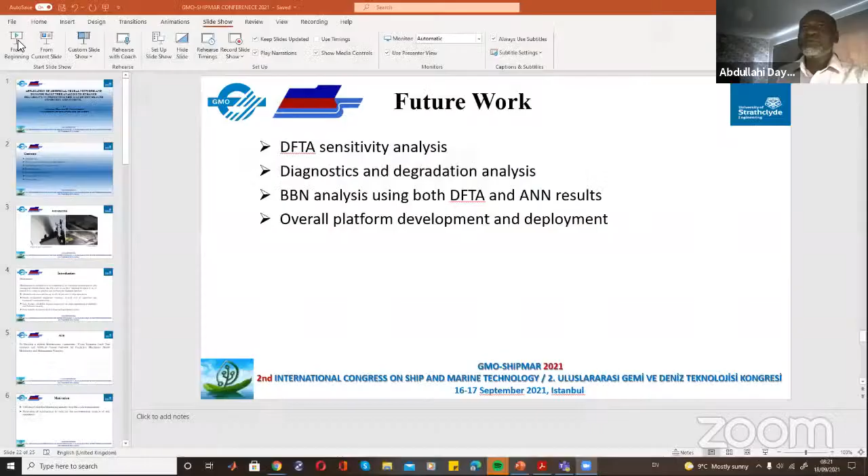So my name is Abdullahi Daya. I'm from the University of Strathclyde. I'm studying PhD in marine engineering, and my main research area is on ship systems reliability. I'm currently serving with the Nigerian Navy as a marine engineer, and I hold the rank of commander.

This morning, I will be presenting on the application of artificial neural network and dynamic fault tree analysis to enhance reliability in predictive ship machinery health condition monitoring. To do this, I will be discussing introduction, motivation of the research, background and literature review, my methodology, machinery data analysis, results and discussions, then we'll look at future work.

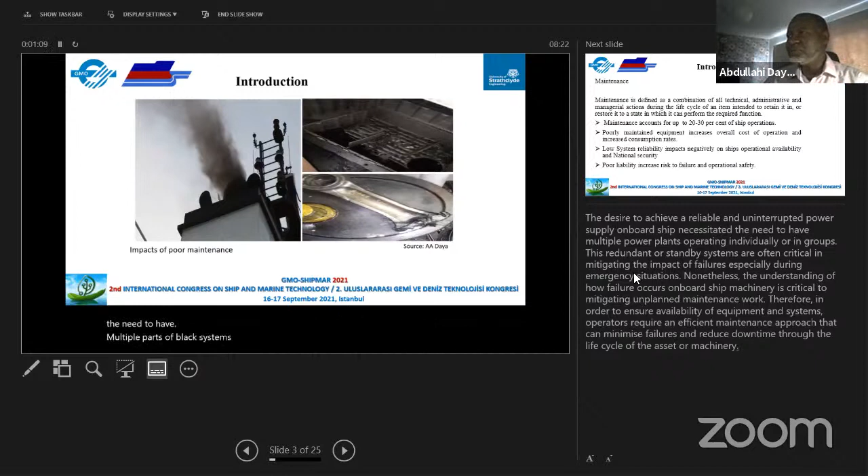Maintenance. The desire to achieve a reliable and uninterrupted power supply on board ship necessitated the need to have multiple power supply systems, either in parallel or individually, just to make sure that the ship is always available.

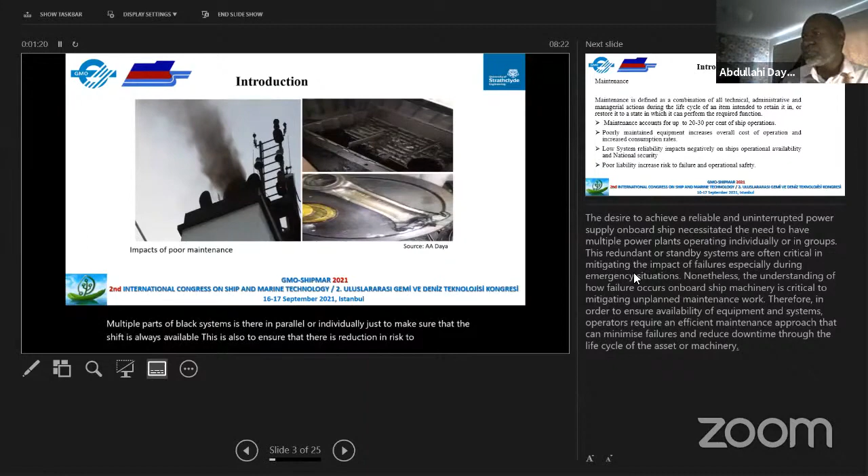This is also to ensure that there is reduction in risk to navigation, and also there is enhanced safety. Therefore, to improve this, there is need for an organized way to ensure that these machineries are always operational and available. Therefore, maintenance is defined as a combination of technical, administrative, and managerial actions during the life cycle of an equipment.

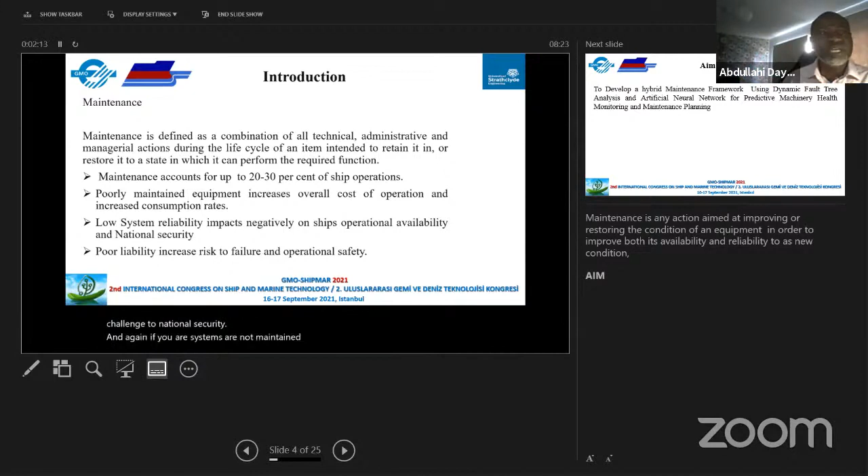Accordingly, my aim is to develop a hybrid maintenance framework using dynamic fault tree analysis and artificial neural network for predictive machinery health monitoring. That's the overall aim of the research.

What motivated the research is the utilization of condition monitoring data for ship life cycle management. A lot of times you discover that ships towards the end of their life face a lot of challenges, and I feel if there's proper record keeping, we may be able to have a better life towards the end of the ship. Also, the relevance of maintenance to reducing the environmental impact of shipping operations.

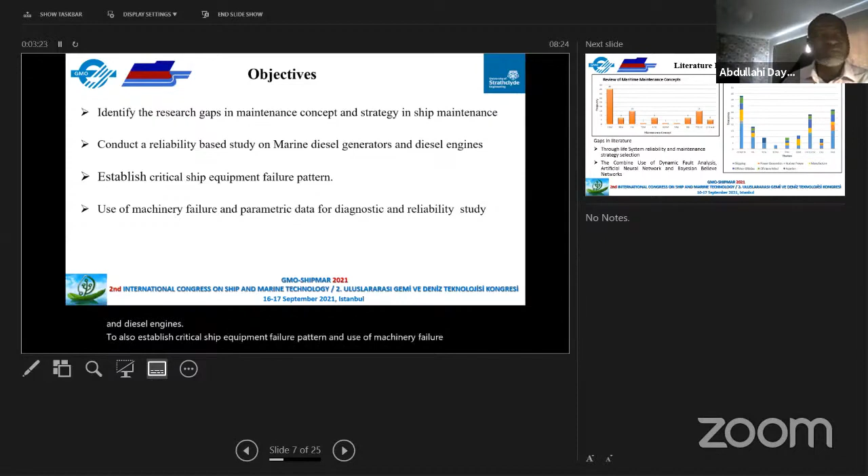Therefore, the objective of this study is to identify research gaps in maintenance concept and strategy in ship maintenance, to conduct reliability-based study on marine diesel generators and diesel engines, to also establish critical ship equipment failure patterns and use of machinery failure and parametric data for diagnostic and reliability studies.

Within this period, we've conducted extensive literature review to show which aspect of maintenance is most reviewed and which is actually being used in the industry.

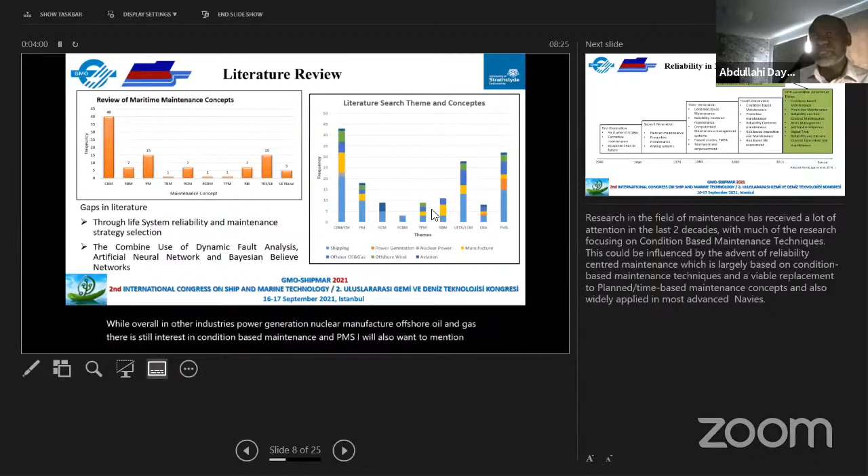So for instance, in the maritime industry, there is a lot of interest in condition-based maintenance, while overall in other industries, power generation, nuclear manufacture, offshore oil and gas, there is still interest in condition-based maintenance and PMS. I also want to mention that maintenance approaches like RCM are still being used, but generally in the maritime industry it's mainly to do with naval shipping.

So over time, the advance in maintenance has led to the emergence of a fifth generation of maintenance, which is based on the Internet of Things, also referred to as Industry 4.0. This is more or less due to the advancement in sensor technology, and also due to the pressure on the shipping industry to reduce its impacts due to greenhouse emission. So a lot of operators are shifting towards condition-based maintenance to mitigate emissions and also reduce high rate of consumption.

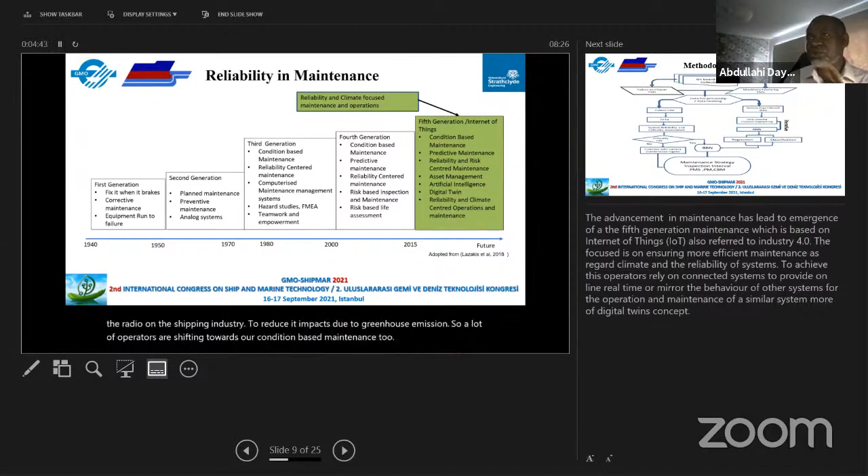The overall methodology for this study is hinged on three things: dynamic fault tree analysis, artificial neural network, and Bayesian belief network. The dynamic fault tree analysis is used mainly for reliability analysis and criticality of equipment, while artificial neural network is used for remaining useful life and classification of faults. Overall, this will come as inputs to the Bayesian belief network to help in maintenance strategy selection on board the ships or the entire fleet.

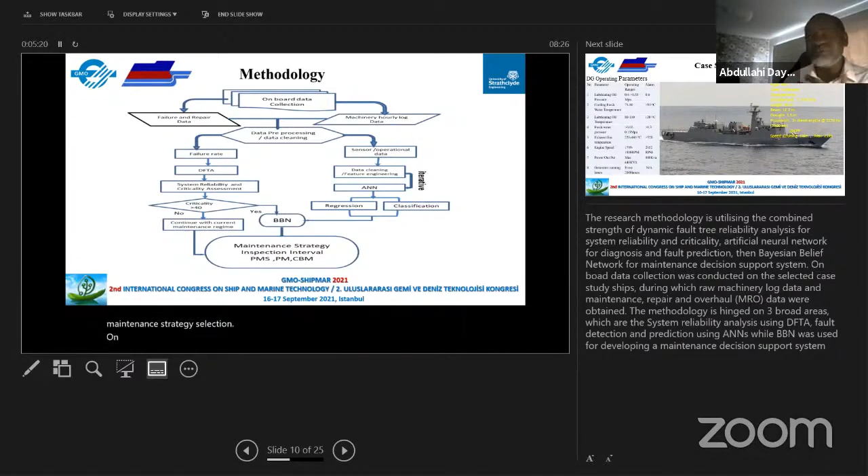To do this study, I have a case study ship, which is an OPV of the Nigerian Navy. She has a displacement of about 1,700 tons, about 95 meters in length. She's equipped with 2 diesel engines and 4 generators, each with a total output of 440 kVA.

So for the ANN, we have the parameters of operational head for the generator, used between the operating ranges and the alarm. This alarm is what I use to indicate faults, and when the operating range is close to the highest level, we look at it as fault development.

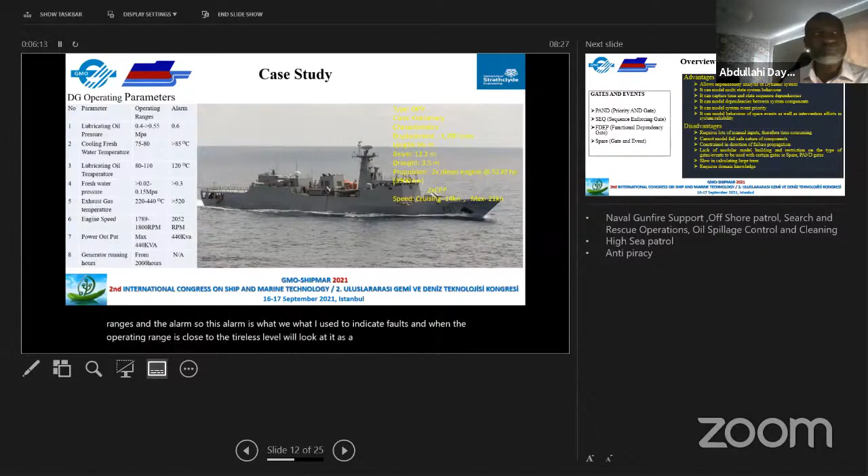This presentation is mainly to do with the DFTA, the reliability analysis. For the reliability analysis, I use FTA, fault tree analysis, which is a procedure based on Boolean law, applying gates and events to describe faulty components and possible events that could develop into a fault. FTA is an important tool for reliability and risk analysis as it provides critical information used to prioritize the importance of contributors to the undesired event or fault.

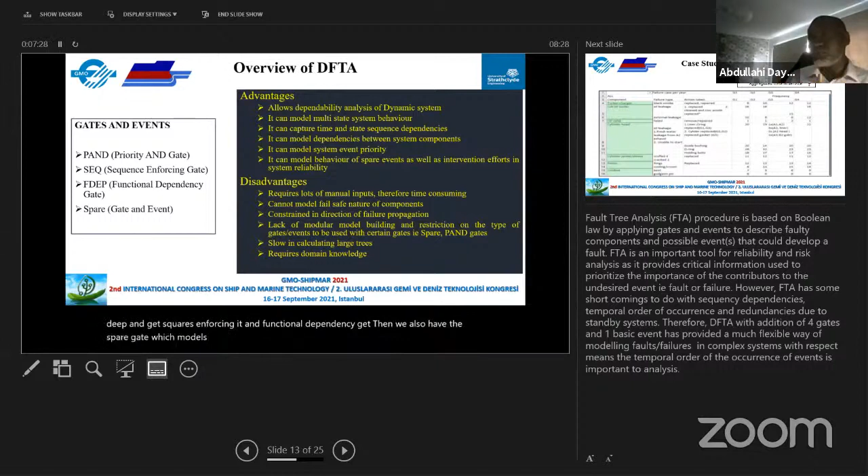However, the challenge with fault tree analysis, especially on board ships and how failure occurs, is that it's difficult to model sequence-dependent failures or temporal events. That is why we decided to use the DFTA, which gives us this added advantage. The DFTA added 4 additional gates to the traditional FTA: the PAND gate, sequence enforcing gate, functional dependency gate, and the spare gate, which models redundancy and additional systems on the equipment to improve reliability.

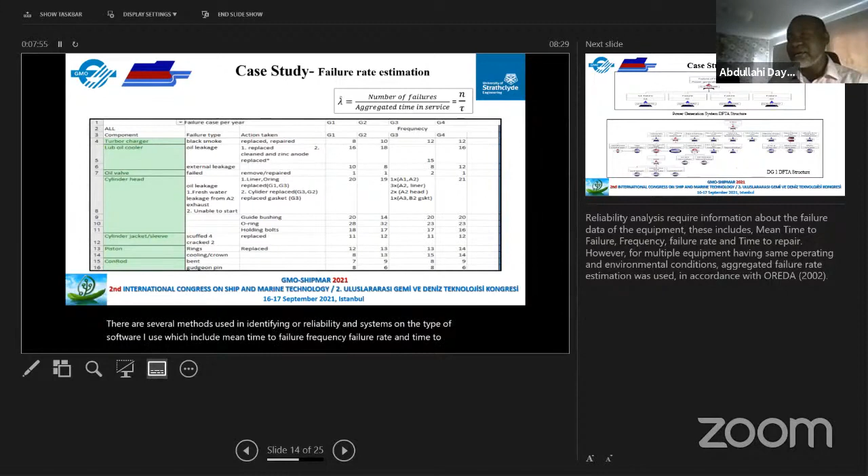So what we are seeing here is a sample of the failure rate calculation. There are several methods for identifying unreliability in systems depending on the type of software used, including mean time to failure, frequency, failure rate, and time to repair. However, based on the data I have from the Nigerian Navy, I decided to use failure rate for components rather than the equipment itself, so we had to calculate individual failure rates based on aggregated failure rates.

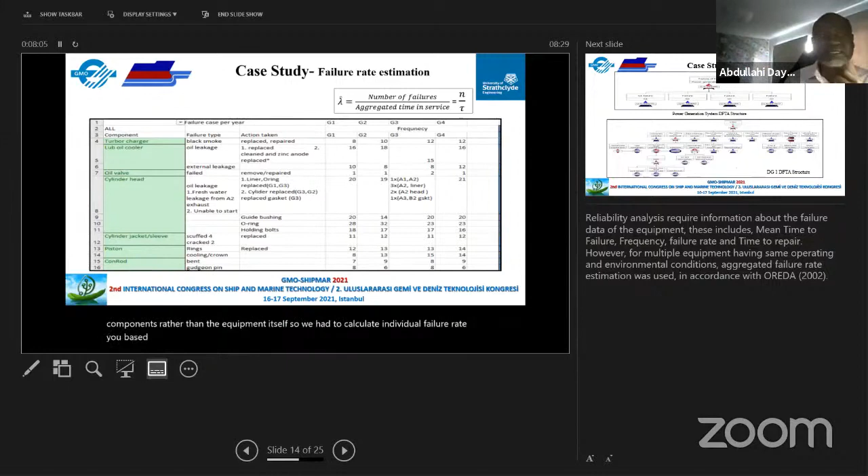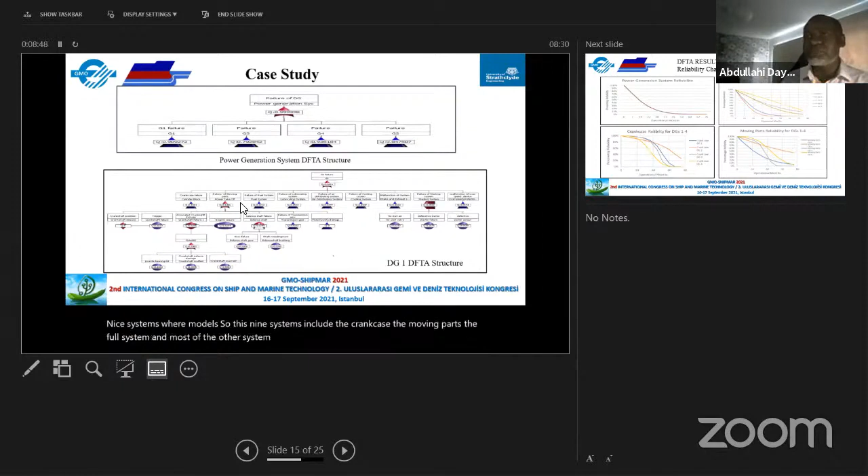Overall, 9 systems were modeled. These 9 systems include the crankcase, the moving parts, the fuel system, and most of the other systems that form the diesel generator. So next, we are going to see the results we have.

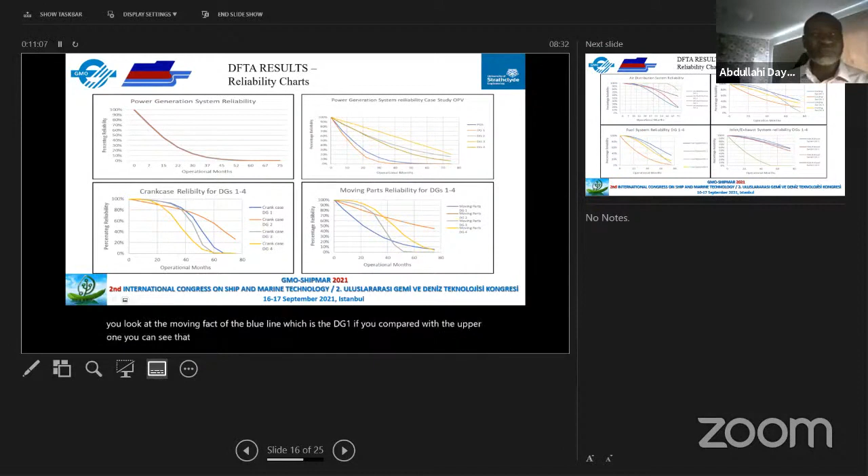We have very low reliability. And here again, if you look at the moving parts of the blue line, which is DG1, if you compare it with the upper one, you could see that it's highly unreliable. So there was a lot of challenge in terms of that.

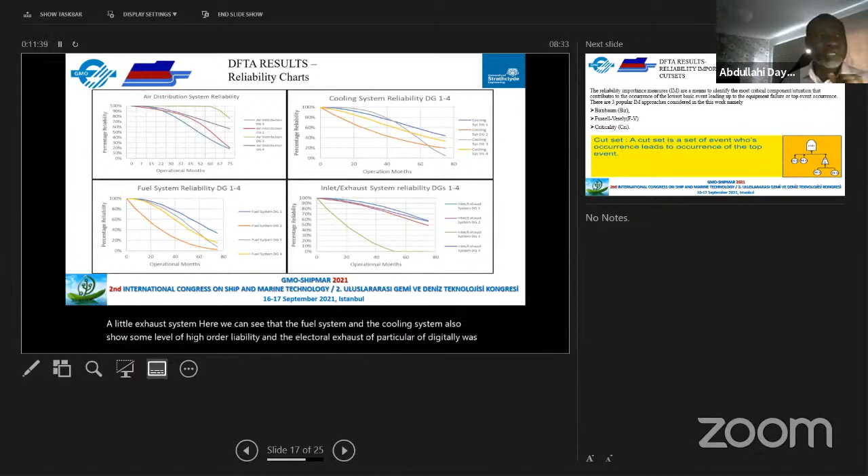So now the next thing we did was to see what are the most unreliable components in the system and what are the most challenging failure types that require to be improved.

So to do this, we have the reliability importance measures and the cut sets. These reliability importance measures are means to identify the most critical component situation that contributes to the occurrence of the lowest basic event. So you have Birnbaum, Fussell-Vesely, and criticality.

However, due to the size of the tree, I decided to use Birnbaum, because it's much more effective in this kind of failure modeling. While the cut sets is a combination of the minimum failures that can lead to the occurrence of the top event.

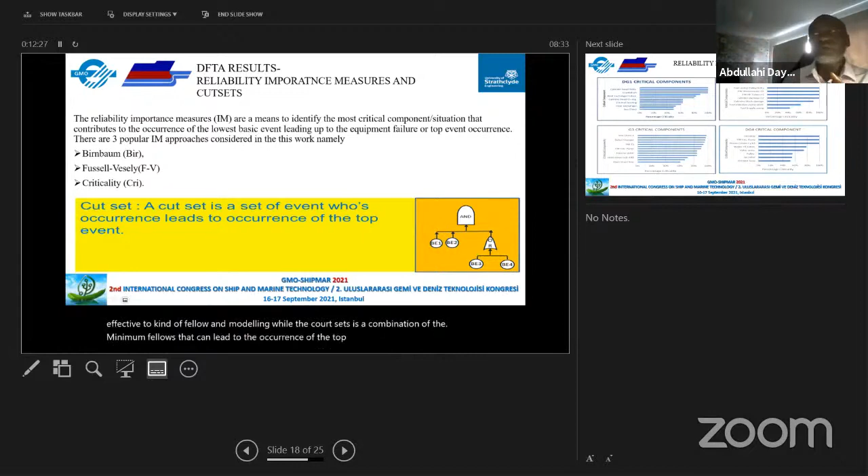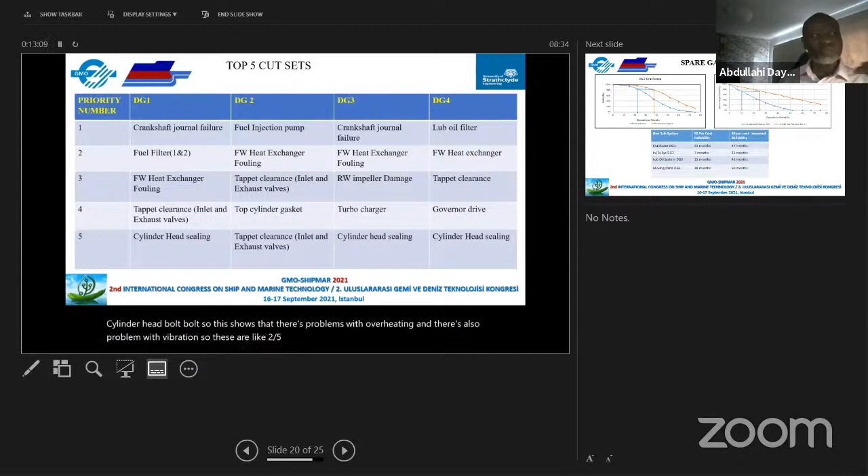And in particular, cylinder head bolts. This shows that there's a problem with overheating and also a problem with vibration. So these are like the top 5 cut sets, which are the most prominent failures we have in all 4 generators. So again, what you have here is the priority number in terms of importance in the generators.

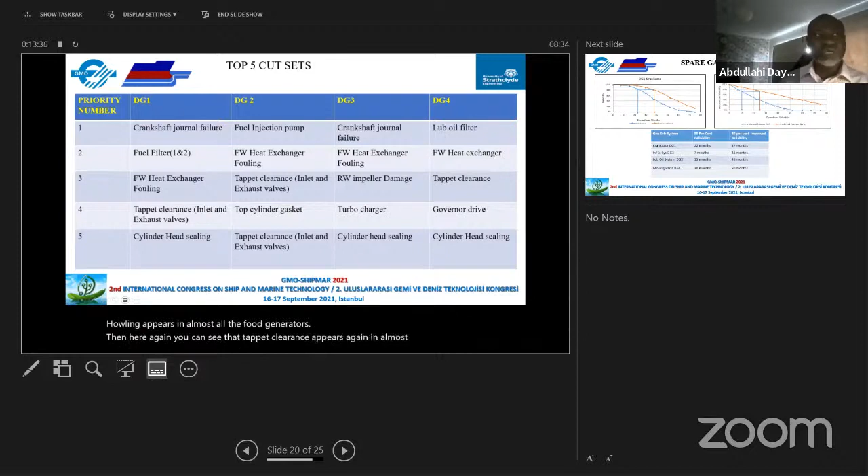So what we have here, for instance, is that freshwater heat exchanger fouling appears in almost all 4 generators. Then here again, you can see that tappet clearance appears again in almost all 4 generators. So again, we could see that this is a very important problem that the operator needs to pay attention to.

So next, we try to see that, okay, after identifying these problems, failures, and critical components, how can we provide mitigating factors to see if it can improve the reliability of the system.

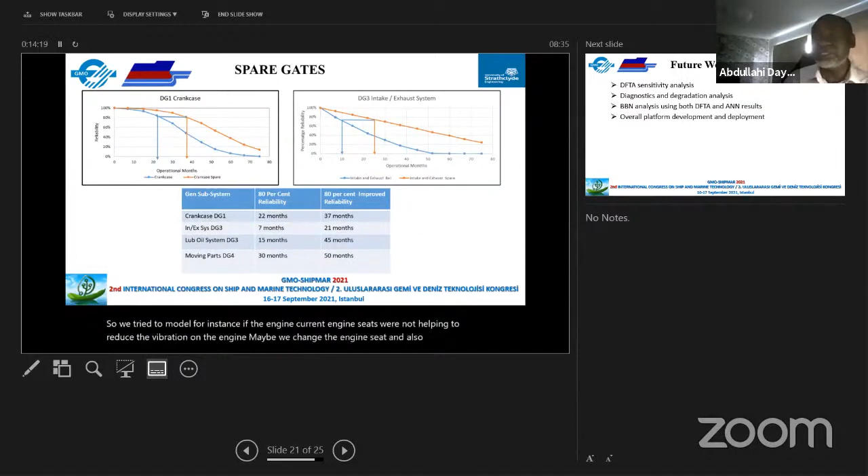And we've been able to achieve that, for instance, for DG1, which had a very unreliable crankcase, with the use of spare gates. So we tried to model, for instance, if the current engine seats were not helping to reduce the vibration on the engine, maybe we change the engine seat, and also try to introduce vibration monitoring on the generator. So by doing that, we have seen that the reliability of the generator rose from 22 months to about 37 months.

Also on DG3, in the intake and exhaust system, it had a problem with the valve clearance, and there was a lot of failures on the generator. We addressed that and we improved the availability to about 21 months.

So these are some of the possible advice we could give to operators in some areas where they can improve their maintenance actions or improve condition monitoring.

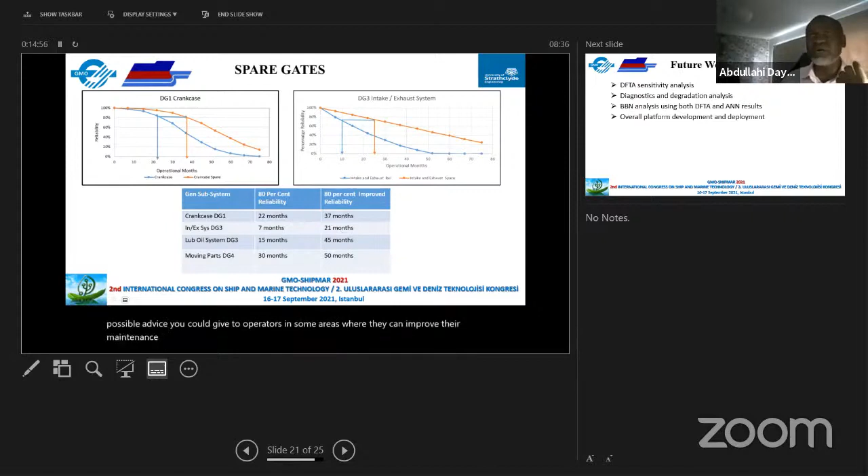So my future work is to look at sensitivity analysis in terms of the condition, and then to do diagnosis and degradation analysis. Also now use the overall output of DFTA and ANN for the BBN.

So with this, I come to the end of this presentation, and thank you for listening, and I'm ready for any questions, please.

Thank you very much for your intriguing presentation, and you managed your time efficiently, Mr. Daya. Are there any questions to Mr. Daya? I think we do not have any questions. Thank you very much. Thank you very much, Mr. Thank you.